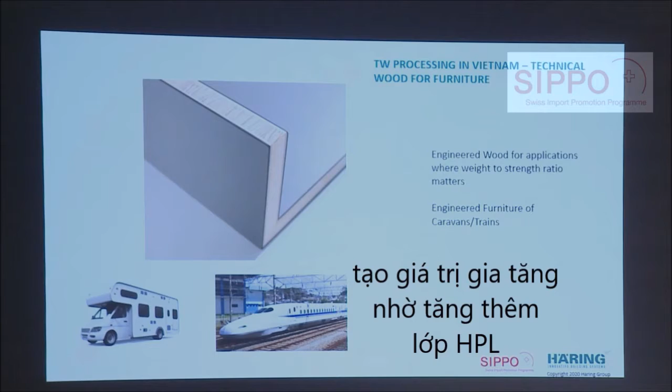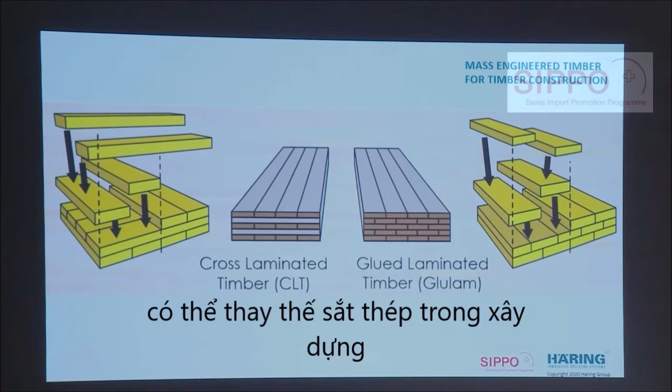So another option that is also possible for timber is mass engineered timber. So you utilize the timber for structural materials that you can replace concrete and steel in the buildings. And there are mainly two different product categories. One is called CLT, stands for cross-laminated timber, and the other one is called glued laminated timber, in short, glulam.

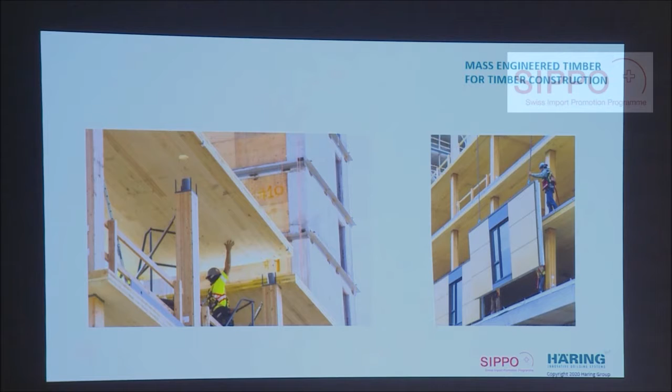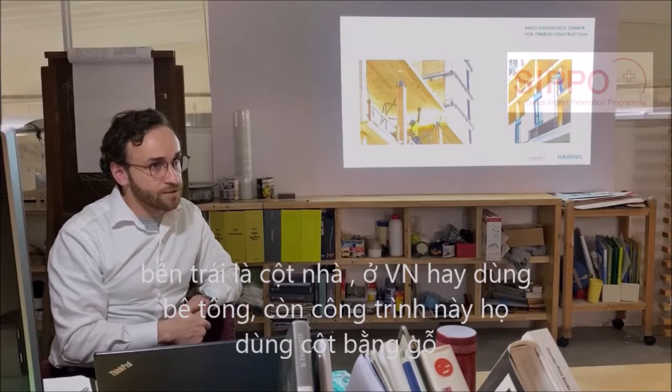Here, just to give you a brief example of what I'm talking about. So on the left picture, you see the columns. Usually in Vietnam, you would build them with concrete or steel. But now with the engineered wood and with the advanced technologies, we can utilize the timber, glue it together, and then have properties that are similar to concrete or steel.

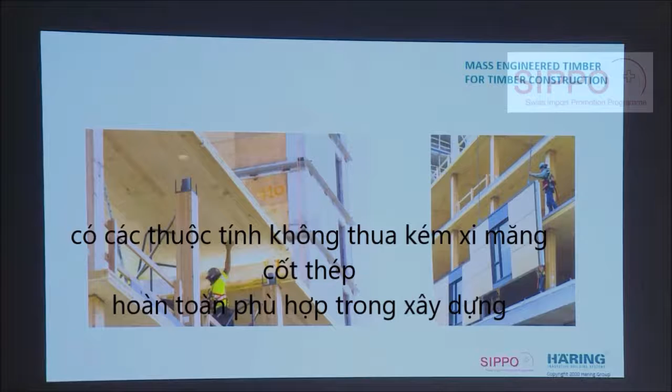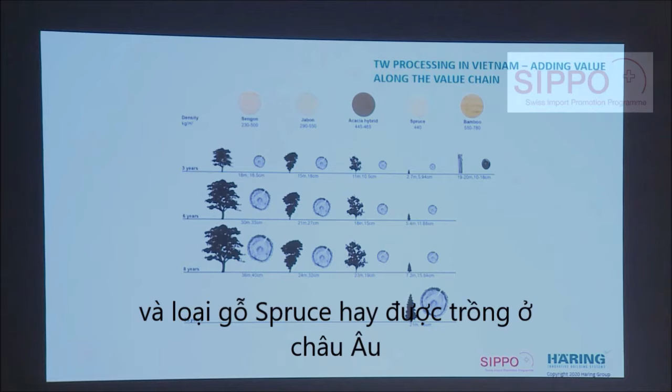The big benefit, this one here, is just to give you a comparison between acacia, which I understand you have a lot in Vietnam, and the other timber species on the right, spruce. So spruce is the usual timber species that we use in Europe for timber construction. But now if you see the growing speeds, until we can harvest the spruce, it takes 35 years or even longer. And the diameter after, let's say, 8 years is only 15 centimeters of spruce.

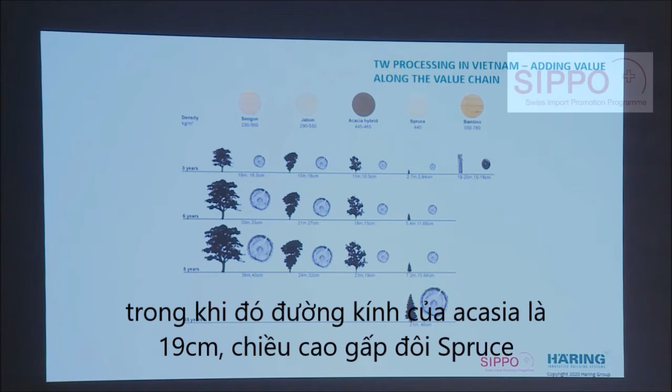But of acacia, after 8 years you have already a diameter of 19 centimeters and the height is almost double the height of spruce. So you have a very fast growing timber species here, which is very advantageous compared to the one that we have in Europe if you think about the growing speeds.

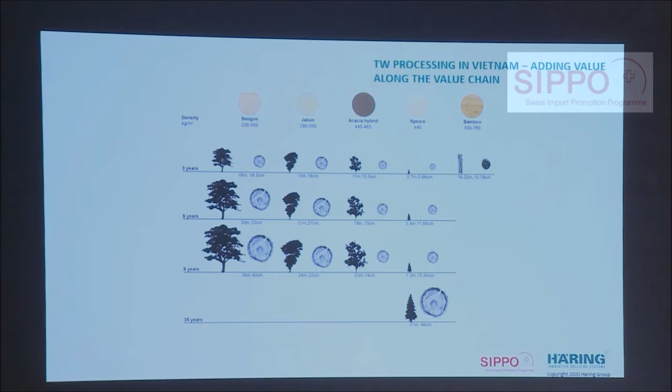What's the current market value of the products that I'm talking about here? So for the manufacturers that are listening, or the traders and the associations, if we talk about the glued laminated timber, then if you think about adding value to your products, you might know your current prices of your products per cubic meter. So for glued laminated timber, the current price in Europe is 750 euro per cubic meter.

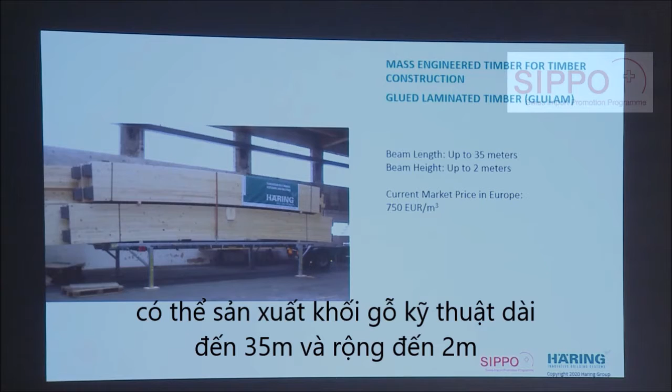And usually you can produce one beam up to 35 meter length and 2 meter high. So that's one piece. 2 meter high, 35 meter length. 35.

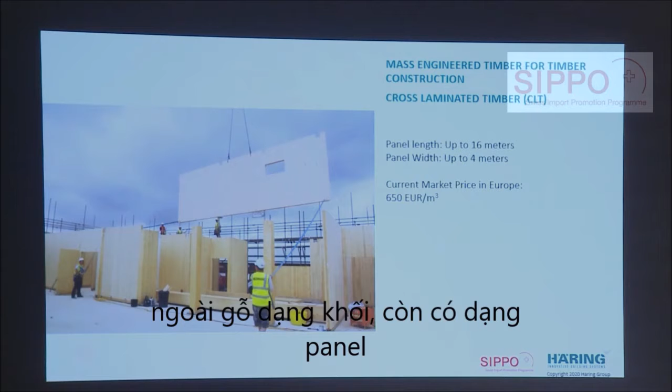Yeah. Then besides the beams, there are the panels that you can use for walls or ceilings or floors. So they are also prefabricated in the factory. And you also cut out already the windows, the doors, and then you just bring them on site. And if you compare with concrete, usually you bring the cement on site and then you pour it and then you need to let it dry for 3 weeks. But here you have a dry construction method, so it's much more efficient. It's like Lego. So you bring the pieces on site and then you just connect them together.

And for these panels, usually you can do up to 16 meter length and 4 meter height. So 4 meter because one story of a building is between 3 and 4 meters. And the price currently for this one here is in Europe 650 euro per cubic meter.

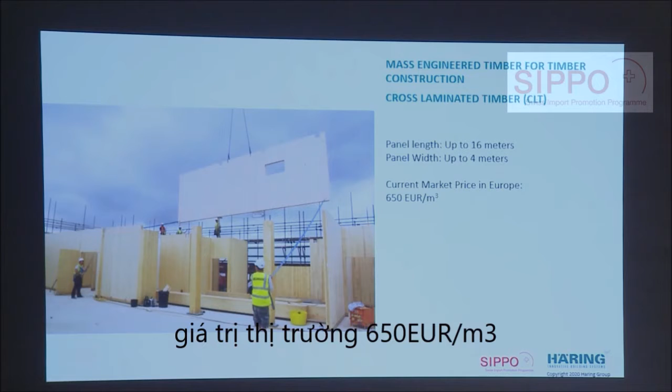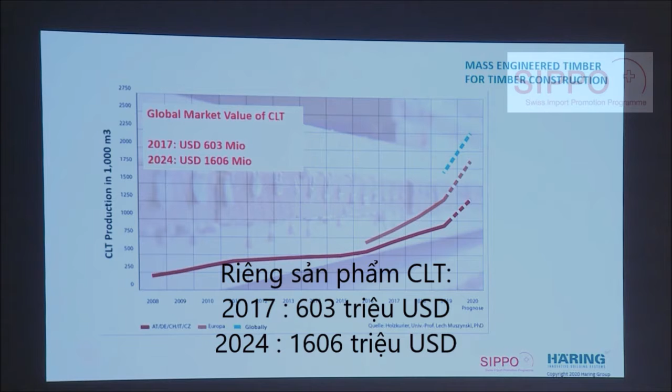About the global market of these products, so here is for CLT. CLT is again this slab here. The global market in 2017 was 603 million US dollars, and it's a very fast growing market. So by 2024 the market is expected to reach 1.6 billion.

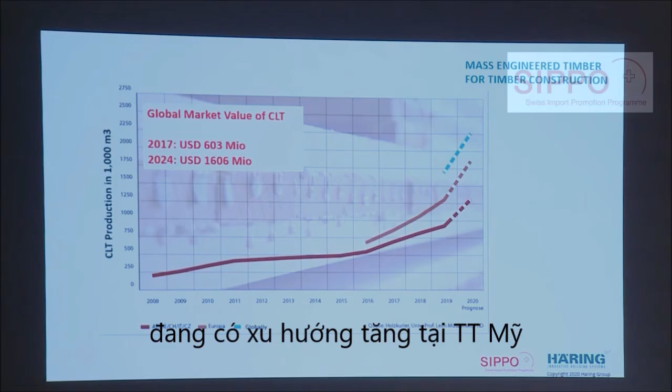And in terms of production, until today 60% of these products are produced in Europe, but for the future America is now doing more, and Indonesia is starting, and I think there is also a big opportunity for Vietnam to tap into this potential for mass engineered timber.

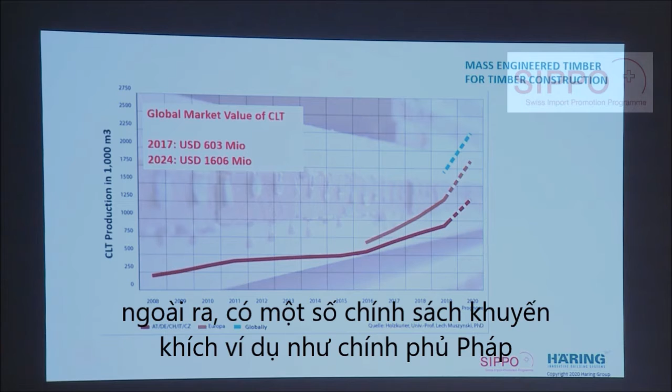Okay, about the trend itself, here we have the numbers. Recently, France has a new regulation for all new public buildings. In the future, all new public buildings have to be a minimum of 50% wood. Then we currently have Singapore.

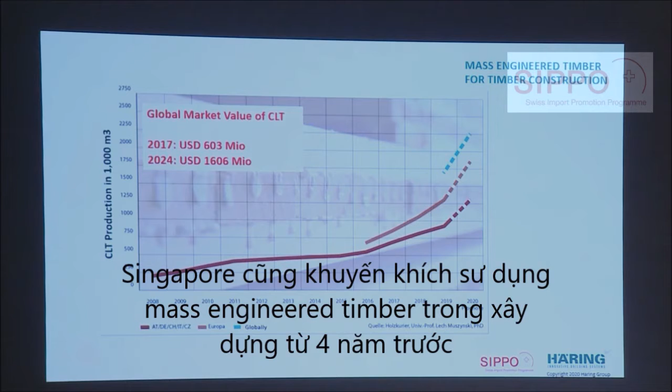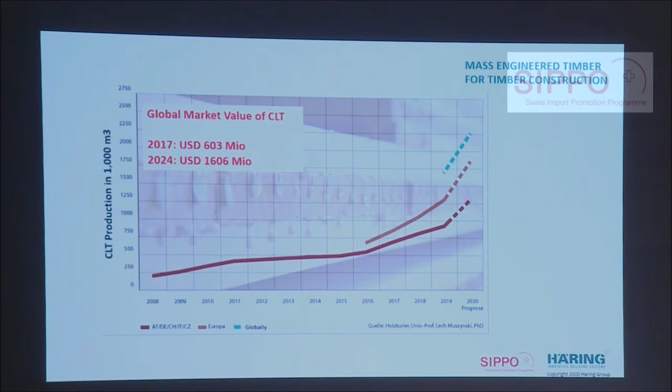The Singapore government adopted mass engineered timber for construction around 4 years ago, and the reason for that was productivity. During your project, for example, you build a house, and you have your real estate investor behind you, so he wants to have the tenants in the house as fast as possible, so he gets the money back as fast as possible. If you compare the traditional construction method with timber construction, with timber construction you can save up to 35% in time for the overall project.

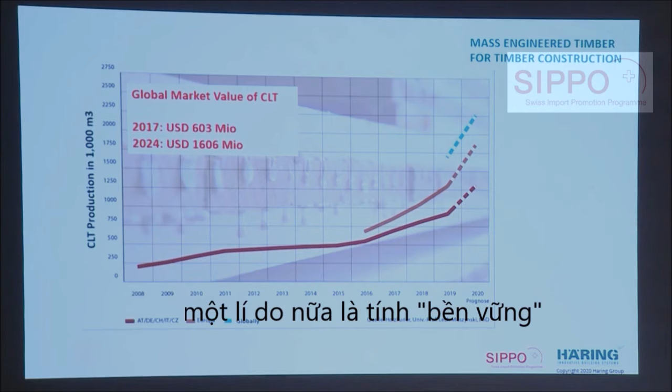So you're much more efficient during construction, which means that the investor of the building can rent out the building much faster to the tenants. That's the main reason why Singapore adopted timber. The other reason is sustainability, because 1 cubic meter of timber can store 1 ton of CO2 naturally.

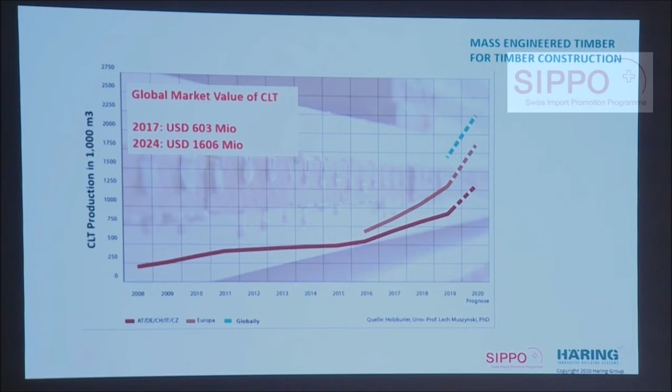If you compare it to traditional methods like concrete or steel, it's the opposite, right? So in terms of climate change reduction, building more with timber, if you source the timber from sustainable forests, is very important, of course, and then you also contribute to mitigating climate change.

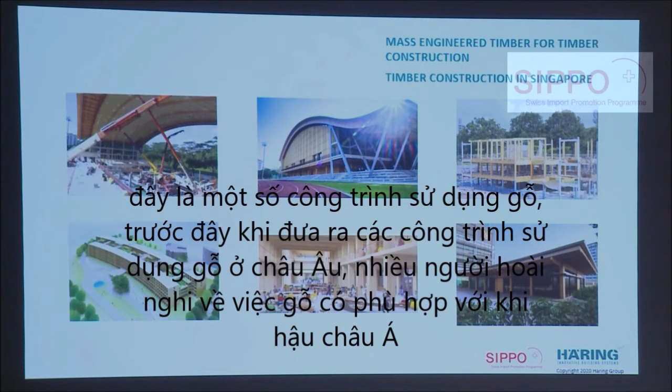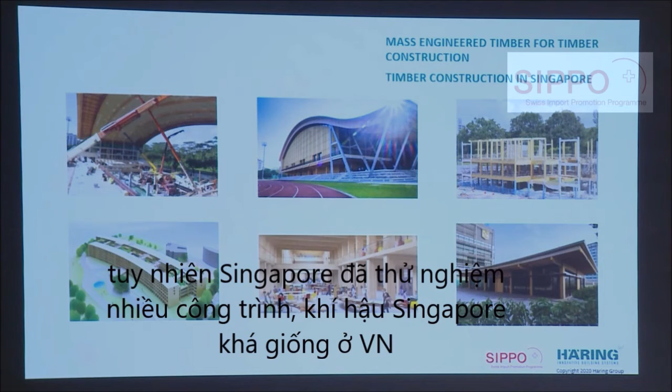To give you some examples of projects, now that we talked about the products and the prices. Okay, on these slides are just some examples. Sometimes when we show examples only from Europe, you say that's not the same climate as we have in Vietnam. But luckily, the Singapore government has already built a few big projects, and Vietnam and Singapore have very similar climates in terms of rain and the weather itself.

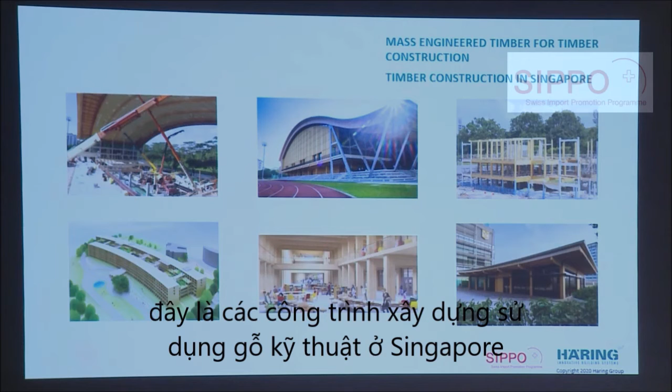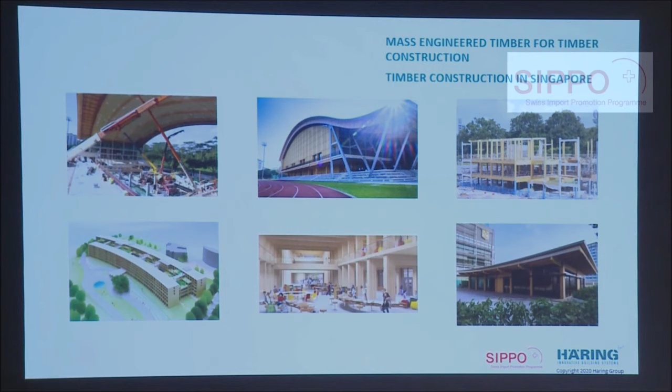On the top left you see the first project, with a span of 72 meters, and the structural member is engineered timber. On the bottom left and middle is a project currently in production and under construction in Singapore. This will be the biggest timber building in Asia. It's a 5-story building, but the amount of timber they put into it will be the biggest in Asia.

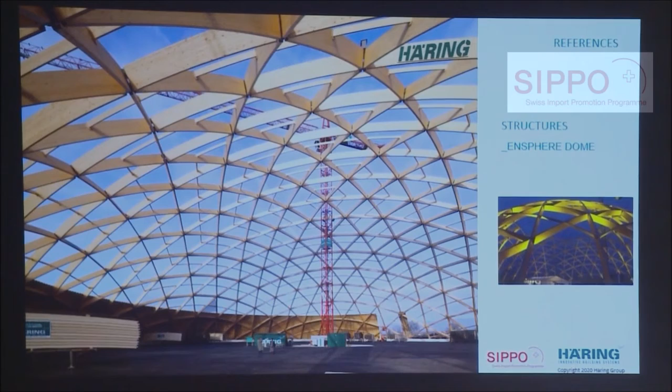And here we have some other project references. This is an in-house development that we did. It's a dome structure that can have a diameter of up to 200 meters, and the structural material is all engineered timber. Of course, if you think about how to transport these huge members, usually each member is only 12 meters long so that it can nicely fit into the containers. And then we have steel connectors that connect the timber members.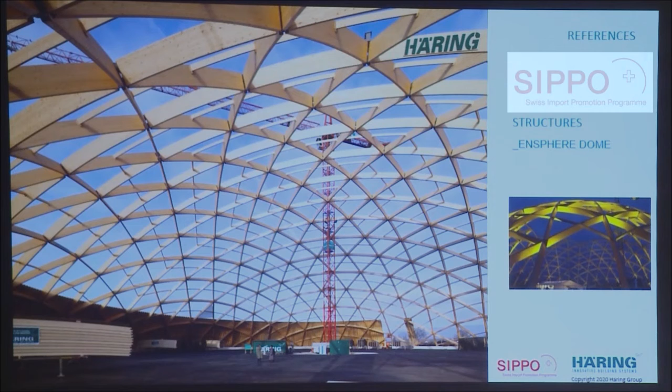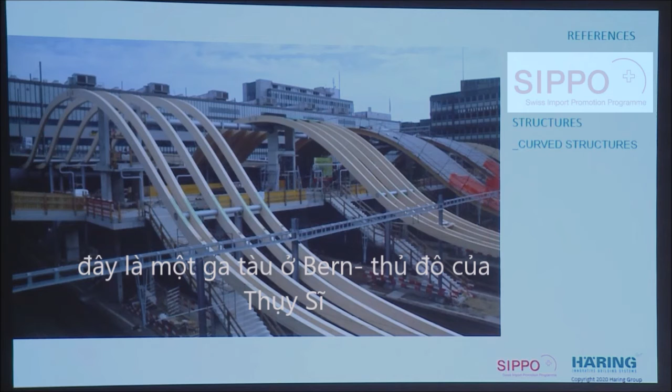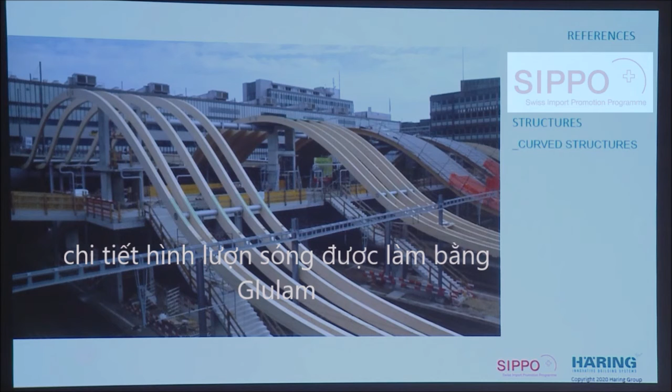This one here is another example, a covering of a train station in Switzerland. That's the main train station in Bern, the capital. The roof covering is a curved glulam structure. Of course, on top of this structure you will later have a covering, a cladding or glass. This one is an example of a different application. It's a walkway, a treetop walk, where you also use engineered timber as the members.

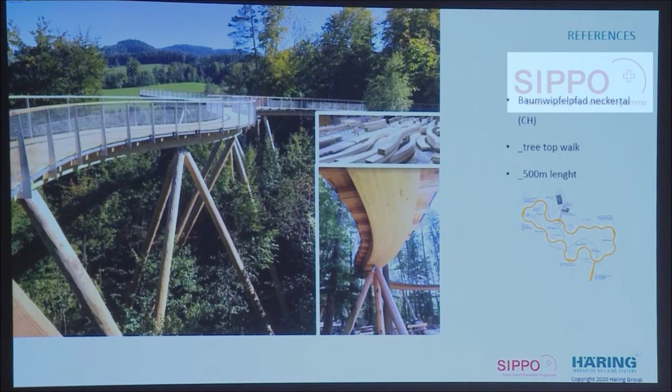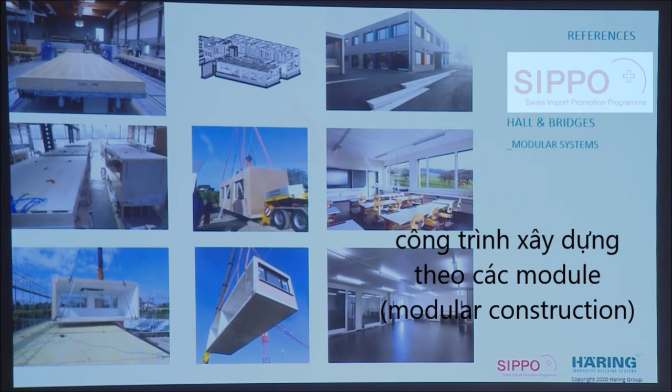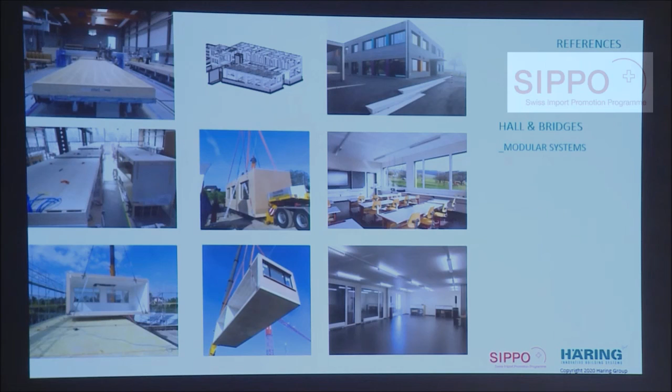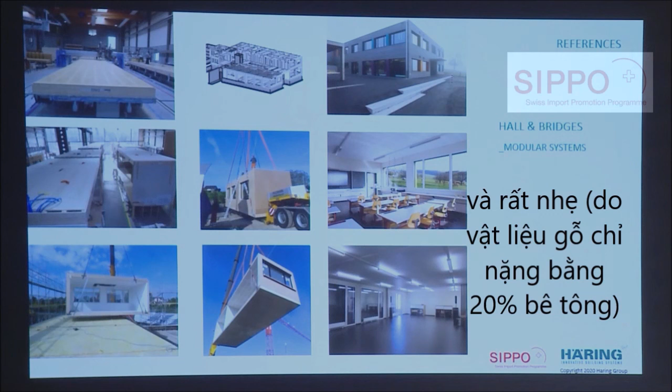Another example, going away from the form structure, is modular construction. The benefit of using timber is that it's only 20% of the weight of concrete. So if you do modular construction based on timber elements, later on during assembly, if you think about your crane and the equipment you need and the speed to erect your buildings, you're much faster with the timber variation because it's much lighter. And the last reference is a multi-sports hall where you also have a curved roof structure.

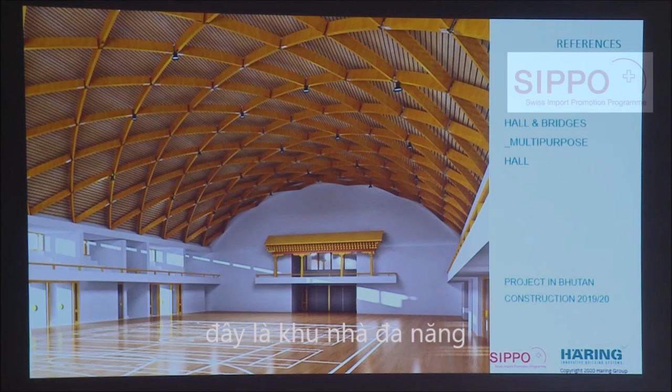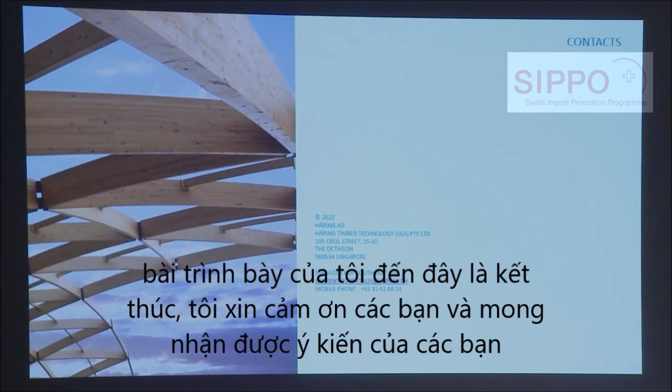Yeah, so that's it for my short presentation, to give you a brief overview of what technical wood means and the opportunities for Vietnam to adopt a few of the possibilities for technical wood.